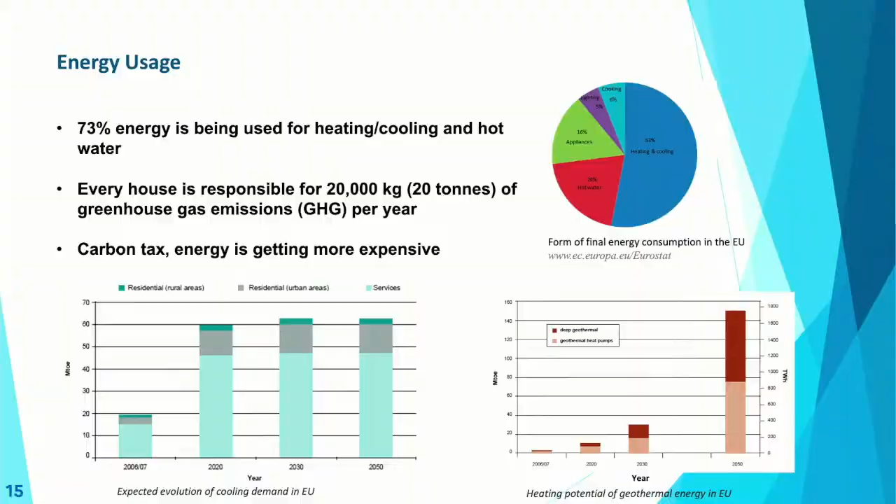What is geothermal? Geothermal energy is something that is free. It's just behind our feet. We know that if we look at our planet Earth, 99% of this planet is at a very high temperature, more than 1,000 degrees. So it's something free that, by estimation, can cover more than 1 million years of our energy demand needs. And it's free, so people decided to use this. But we did not invent anything.

In fact, when you think about what we are doing now, even for 20 years, we are just trying to improve what our ancient people had already developed. We know our ancient civilizations were also very intelligent. They discovered this; we have discovered nothing. We are just re-implementing, reusing what they have done in another way. We are just working on how to re-implement, reintegrate this technology that is very ancient. As early as 4,000 before Christ, they were already using geothermal energy. So it is not something new.

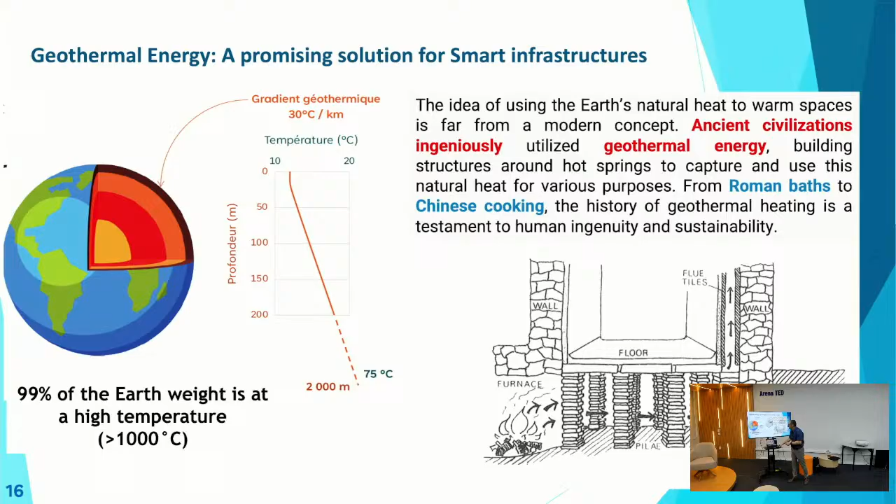When we talk about shallow geothermal energy, what is our concern, together with Professor Christina, is low enthalpy. You know what enthalpy is in thermodynamics - we are talking about low enthalpy or low energy. This uses the fact that at a very shallow depth we have quite a constant temperature. By exchanging temperature between the ground, the soil, and some technology, we can produce heat, and apart from heat, we can also produce cooling - today is very hot, so we're not talking about deep geothermal, we're talking about shallow. Shallow is only to produce heating and cooling. I will show you how.

Among this known, conventional technology, we will work on the integration of ground source heat pumps with some geotechnical materials, geotechnical construction, to provide energy. The next step is to integrate this shallow geothermal energy within what we call a district heating and cooling network. District heating puts all this technology together - all the renewable technologies - inside one unique network, to provide all buildings with this technology. You don't use this here for heating, but in Europe we do.

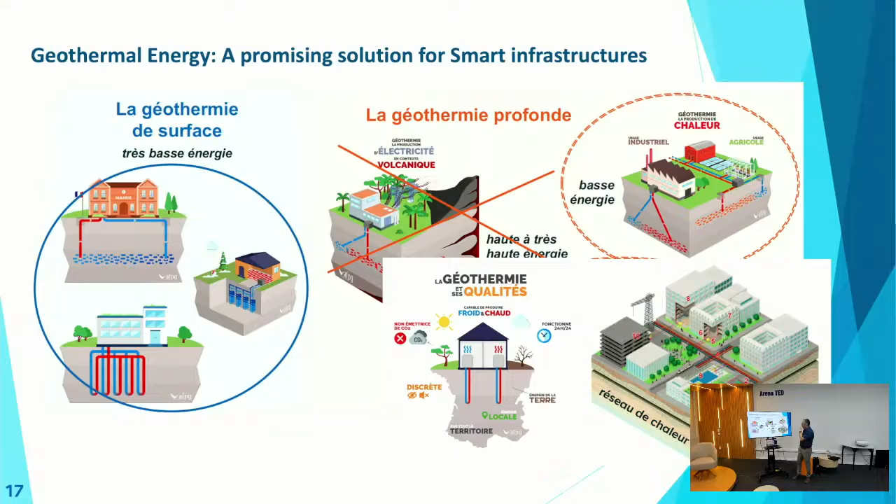So what is shallow geothermal energy? It's something that is more or less conventional technology - this one or this one, what we call boreholes, or aquifer geothermal energy. This technology is quite well known and well used, but it has some issues.

Let's talk about borehole, for instance. What is a borehole? You need to have space - so you need available space where you won't be able to build something else. You lose this space for future development. If you have space, for instance, someone building a home with a garden, they could put this in, but there are some issues with how it works. You have to drill, about 20 to 30 centimeters, and inside you put some tubes to extract the heat from the ground and inject it using a ground source heat pump, transforming the heat extracted from the soil into heating.

Why is it an issue? Because first, you need some space, as I told you. And secondly, when you drill, you need also to fill. You will use some grout, so it has a carbon impact, a carbon footprint that is not negligible. So this technology, even if it is quite good, has some bad issues about this carbon footprint and also about the necessity to have available space.

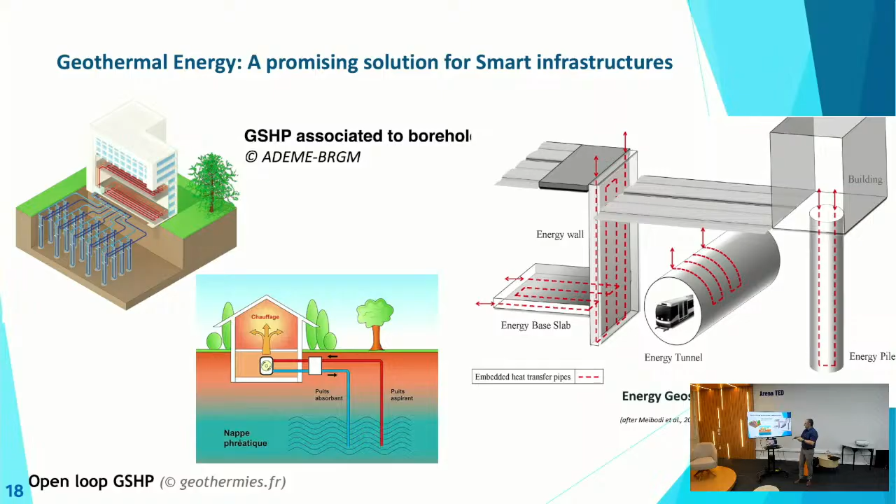And from this, geotechnical engineers, we, maybe from the 1980s, so more than 40 years ago, had this idea to say, okay, instead of implementing these tubes to exchange heat from the ground, why not integrate them in the piles that geotechnical engineers are designing? Because in all cases, we are implementing structural elements: piles, diaphragm walls, base slabs, tunnels.

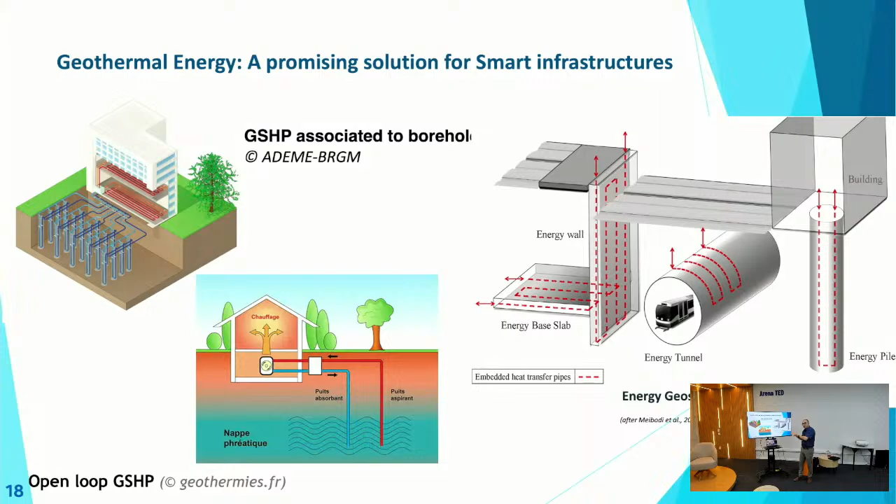Every geotechnical structure embedded in the ground could become a source of heating. This is how this technology has been implemented 40 years ago, and this is what we are trying to address. So let's talk about this technology.

As I told you, this technology is really interesting for us because, as you may understand, it has a dual role. Dual role means it has initially a structural role. These structures you see here or here are designed for a structural purpose. Then what you do, you integrate some tubes.

Inside these tubes, you will circulate a fluid at a certain temperature. The fluid will interact with the structure, which is mainly composed of concrete. This is the steel cage of a pile. This is the steel cage of a lining of a tunnel. This is the steel cage of a diaphragm wall. And in all these structures, you have these tubes where fluid is circulating and interacting with the ground.

And why does it now become very interesting? Because it is a very cost-effective shallow geothermal energy solution. Why is it cost-effective? Because the extra cost of this technology is only composed of the cost of the tubes. Because in all cases you need to have this structural function. In all cases you will need to pay for the concrete and for the cage. So the extra cost only comes from this, and also the heat pump.

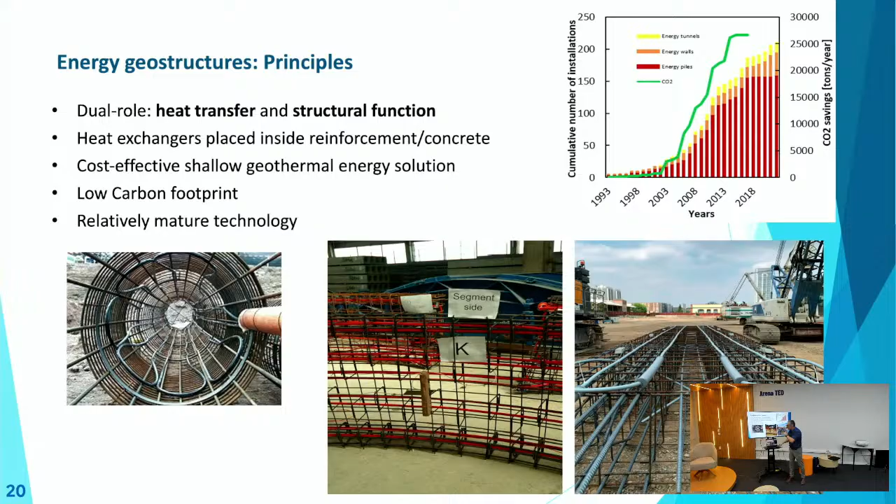And what is now interesting with this technology—you remember I told you, maybe I will talk about it later—let's just have a quick overview, because you should be aware of what is done in some experimental sites. You have some here, we have some. But you also have to know that this technology is quite mature. This is what I told you: it has been implemented in some real cases, not only buildings, but some very big projects.

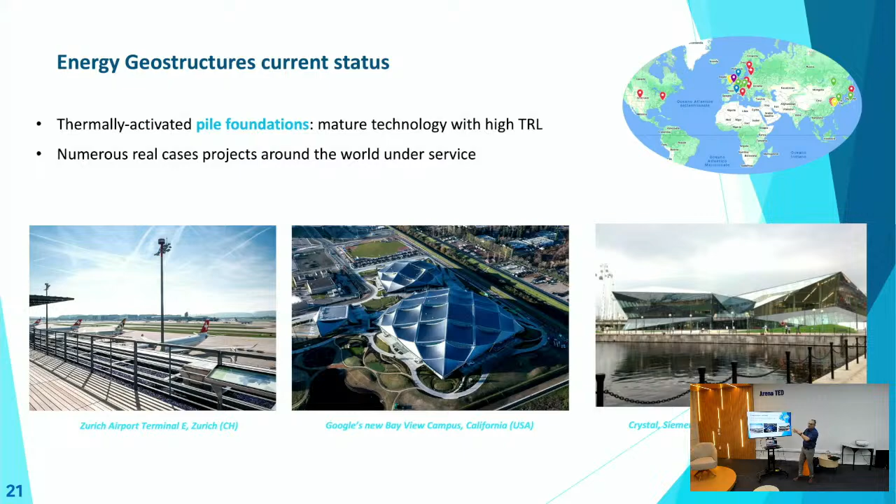You have the Zurich airport terminal, which is composed of energy piles. The same for the Google campus in the United States. They use this technology. The Crystal, Siemens—you have several cases existing. Also in Brazil, I know, but we'll need to update it.

Let's give you some inputs about this technology. Take Zurich Airport, for example. 306 piles are energy piles among the 441 piles that have been used. With these piles, this technology was able to provide over 70% of the heat demand.

That's not negligible. The other 30% comes from, let's say, an aerothermal heat pump, so with electricity, but at least they save 70%. What does this represent? In terms of mazout, the fuel they use for heating, it represents about 150,000 liters of mazout saved per year. You see the impact - it represents 400 tons of CO2 saved per year. So it's not negligible, you see?

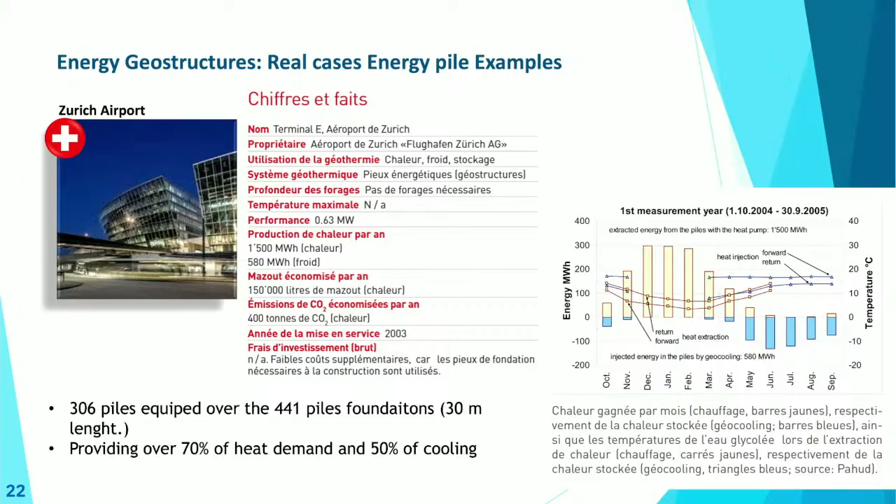And because of this first success story at Zurich airport, they decided to build an extension of this airport, integrating 1,000 new energy piles. You see, almost all the piles will be energy piles because you can combine depending on the energy demand and how you want to design it. You can decide, if you have a project with 1,000 piles, that 70% of them could be energy piles, or more. Here, they decided almost 80% of the piles are energy piles in order to cover between 75 to 100% of the energy demand of this extension.

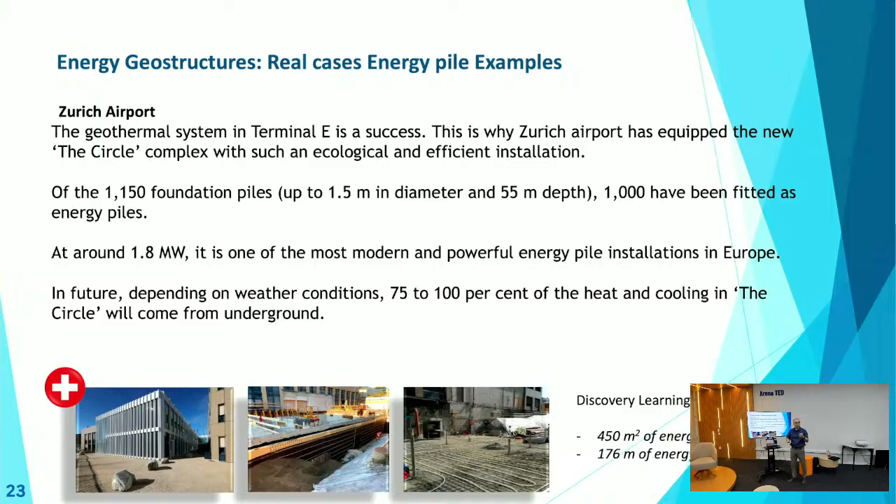So you see that you have real cases that demonstrate not only the feasibility but also the potentiality of this technology. This is something quite interesting.

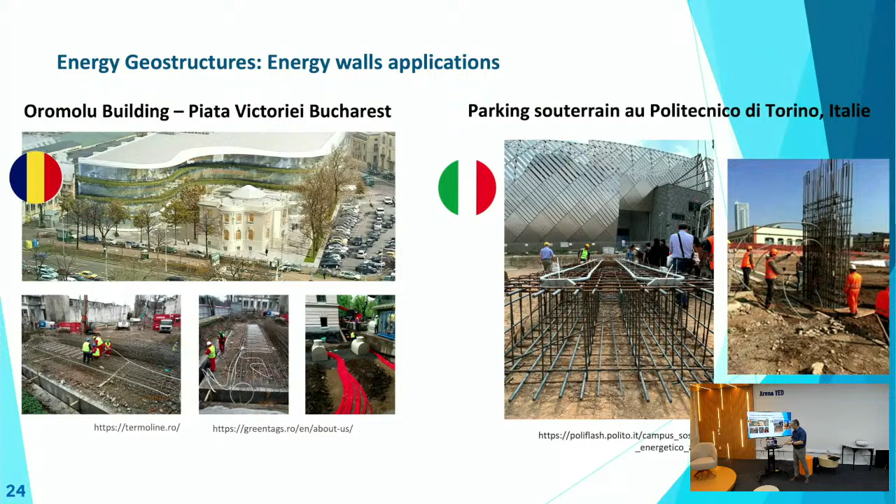I was talking about piles. Here, some real cases - we also have some other real cases about energy walls, these diaphragm walls, in Romania. They have some real cases. In the Politecnico di Torino in Italy, they also have this case. These are real cases, not small, not experimental. In France, there's also a metro station under construction that will be delivered next year. They use energy walls for the wall, but also for the basement, equipped.

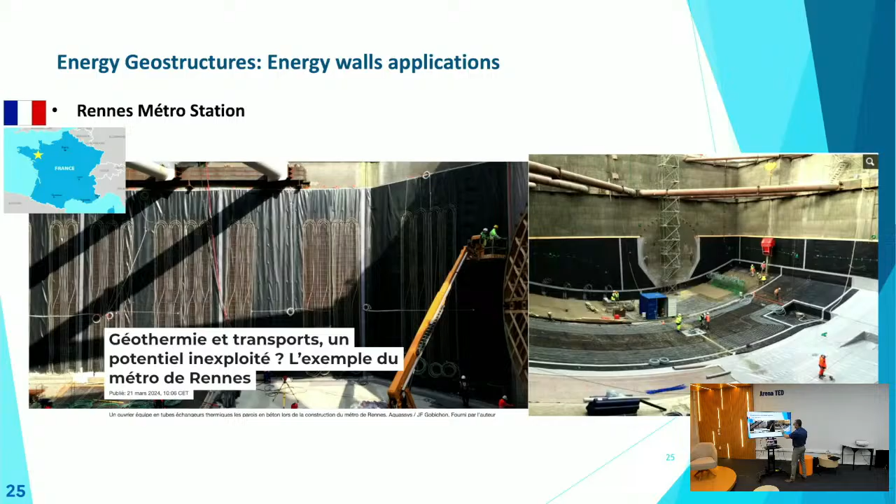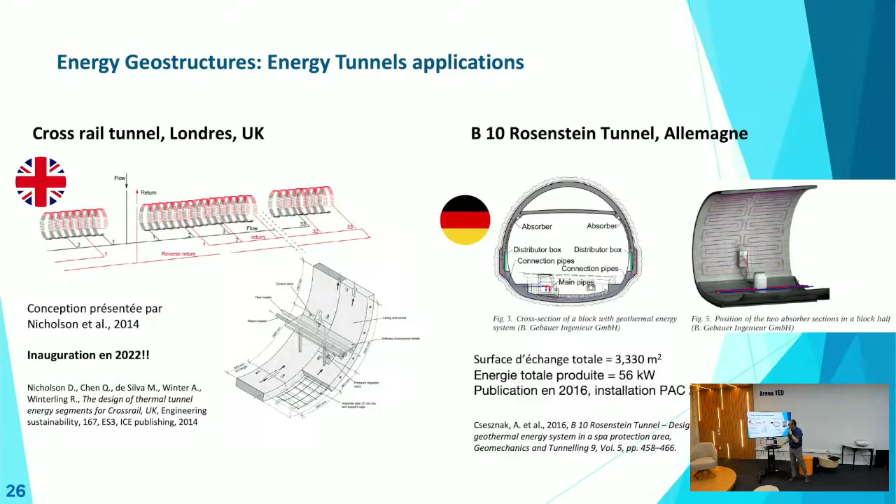You also have tunnel applications - a new one that was inaugurated 3 years ago, another one here in Germany. So they exist, but they're still quite particular technology because it's not every day that you build a tunnel. Mainly every day you could find a builder building piles, which is why we mainly concentrate our knowledge on piles, but also look at some other technologies. There are also some other innovative applications.

We have what we call quay walls. I don't know if you know what quay walls are. When you have a river and want to protect the wall, usually you use maybe wood panels. It's along the rivers. In every place, sometimes they put concrete panels, sometimes they put walls, but in Europe, mainly in the Netherlands but also in the north of France, they use metallic structures called quay walls.

Integrating energy walls here is a real positive and innovative technology, because this geothermal energy is not only capturing the thermal energy of the ground, but also of the water. So you exchange between the water and the ground. It's really interesting. We have these tunnels, as I already talked about, and we have micropiles.

I don't know if you know what a micropile is - it's a small pile. Among these, when do we use micropiles? We use micropiles in some specific applications, but also particularly when you have to retrofit a building, especially when you have a building that may experience differential settlement. Sometimes you have buildings with very important cracking, and then you ask, what do I have to do? I have to reinforce the existing foundation.

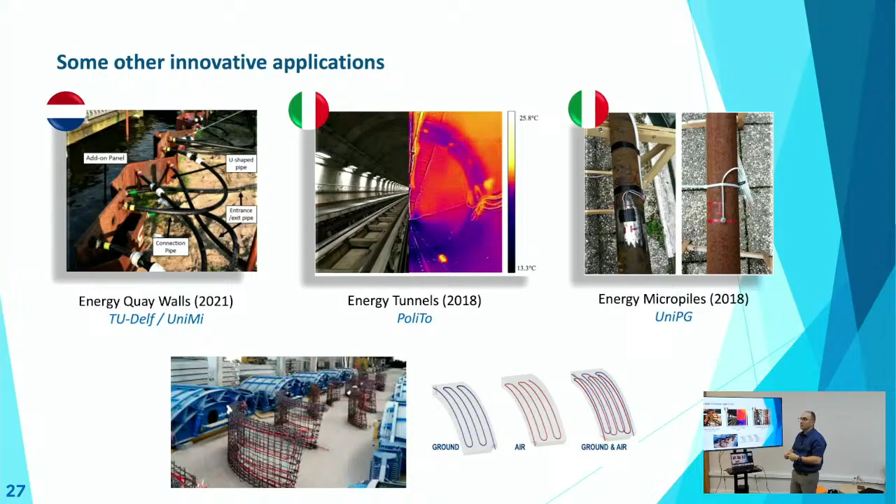Next year I will start a PhD position working on this topic, on a specific challenging material: chalk. As I told you, chalk is a porous media, and we have some challenges to work on the chalk behavior using this technology. So this is something we will start working on next year.

Just to finish with this part and then move on to the physics, because I'm not going to show you all the real cases. We have collected, among a project that I am coordinating in Europe, called FOLIAGE—you can look for it, if you put foliage you will find it—we have collected like 800 real cases over the world.

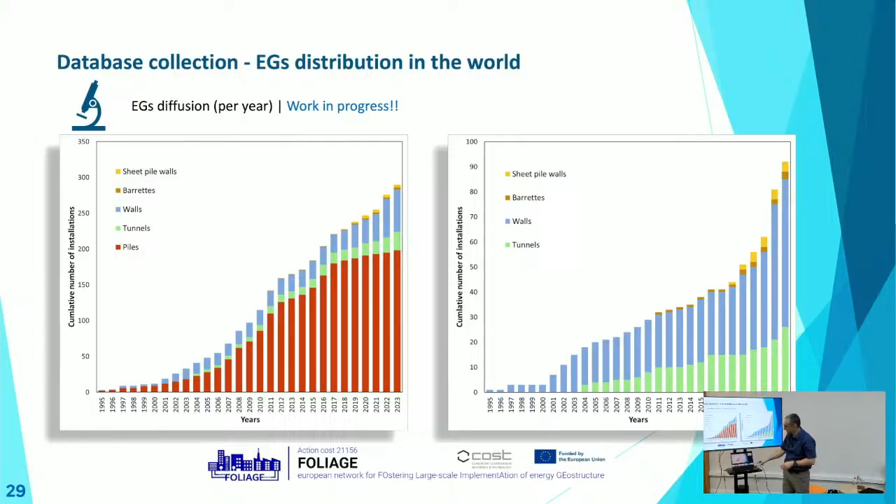As I told you, piles are the major part of real case installations in Europe. This represents the piles, and this is a zoom. This one represents tunnels, walls, barrettes, and sheet pile walls, where these systems are used for extracting heat. You have the evolution over the years, as you can see. We have collected this information and have more or less this representation, and then we will move to the next step.

You see that mainly this technology has been implemented in the UK, Austria, Italy. Where is France? France is here—we're not so bad, but we still need to improve. The objective is that all countries in Europe, and even over the world, start to use this technology, because we have proved, we now know that this technology works and is mature. Our work is to promote this technology, so this is what we are looking for: increasing this.

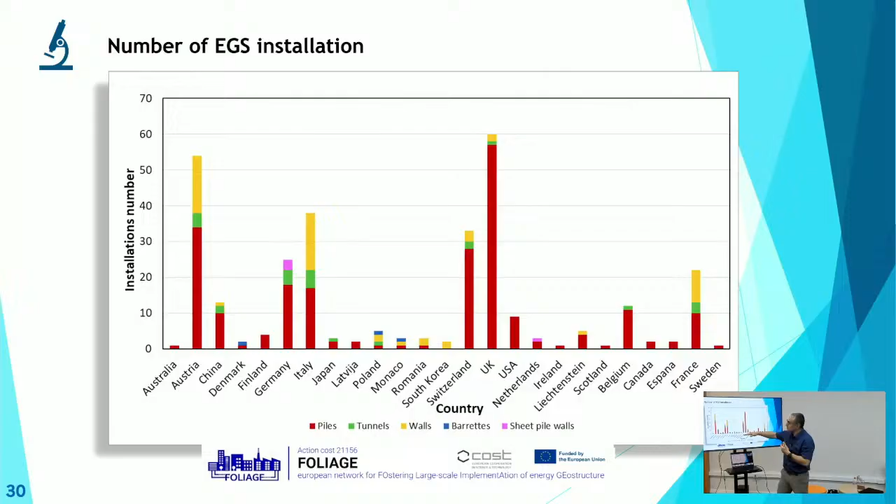That's enough for introducing EGS, what we call energy geostructures. Let's talk about the physics behind this—this is not new for those who have... what is the physics? This figure is really interesting if you take time to look at it. It explains all the physics behind the technology we are working on, and it explains why we need to continue developing research, because, as you understood, energy geostructures is a multi-physical problem.

You agree? We have thermal exchange. This thermal exchange has a logical interaction with the hydrogeological condition, with the ground and the hydraulic potential of the ground. If you have water, if the soil is saturated or unsaturated, if you have groundwater flow and so on, we know that heat can be transported hydraulically. So you have a strong interaction between thermal and hydraulic behavior.

And also, we are all physicists—mechanics is a part of physics. We know that when something is heated or cooled, it will react: it will expand or contract. So we know we also have a mechanical interaction. So we have this thermo-hydro-mechanical interaction that makes this problem quite complicated.

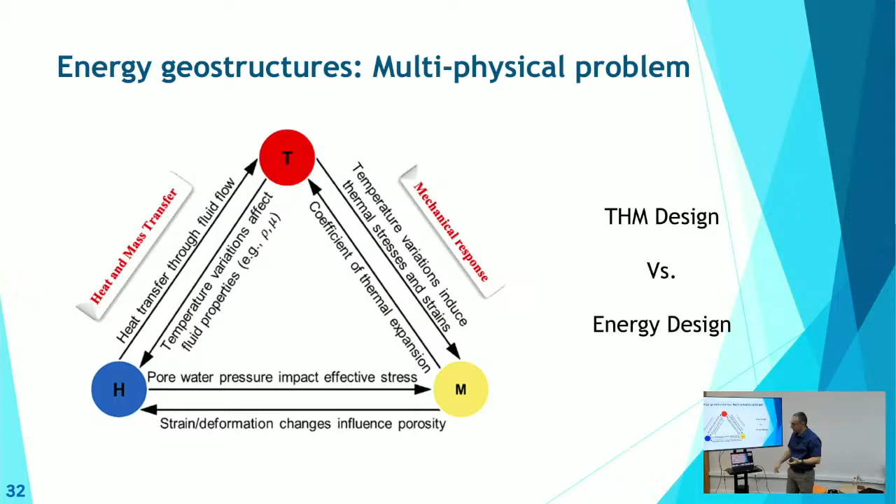We are all doing the same thing: we calculate the amount of energy extracted from the soil or injected, and also how it behaves. This is what we are doing. So we have two main systems.

Let's take a look at the first one, the thermo-hydraulic principles. I took the example of a pile, but whatever we use, it's always the same.

What is happening? Remember the geothermal flux, the heat coming from the center of the earth. This natural heating helps the soil keep a constant temperature. These are some values from France, but here in Brazil it's different. In France, we know the temperature of the soil varies.

You know how the temperature evolves. Depending on the outside temperature, you'll have a decrease or increase of temperature, and then it becomes constant, depending on the region in France or Europe, from 10 to 15 degrees, it depends.

Here in Brazil, it's maybe 23 degrees. In Lille it's 14, in the south of France 15 to 16, in the Netherlands it's 10. It depends, but what's important is that the temperature becomes constant.

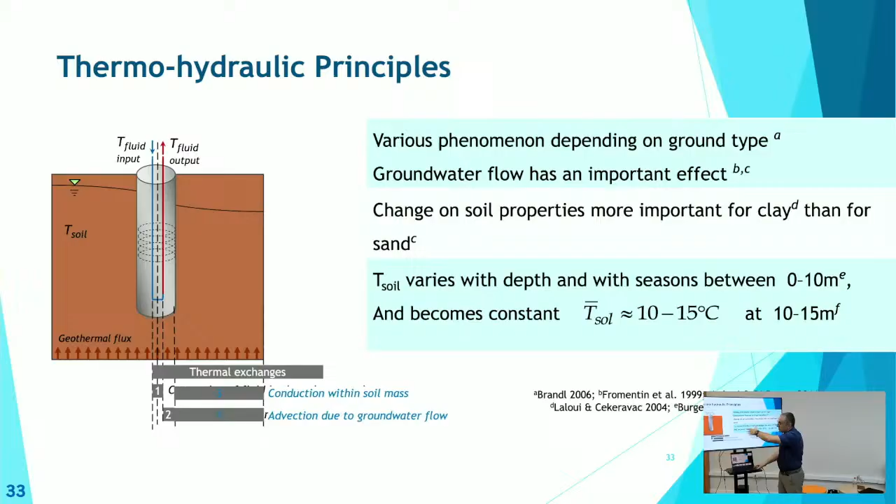What we know, because we can discuss this for hours, but at the end, what you need to know is that the main factors that influence the thermal performance of these energy structures are, first, the ground, the structure itself, pile, energy wall, tunnels, whatever you want, the internal environment, so the air, or if it's a diaphragm wall, the interaction with the inner temperature, if it's a tunnel and so on, and the absorber pipes themselves.

When you look at the ground, we know that the factors influencing it are the ground temperature, and the thermal conductivity, which we have to calculate and measure. Have you ever heard about TRT, the thermal response test? Some of you haven't. So we have some tests, some possibilities to estimate it. But you will see it's not really obvious, because the soil is not homogeneous. The constitution of the soil is quite complicated, and if you have several different layers, which I'll present later, you'll see that this parameter, which has very high importance, is not so obvious to determine.

You also have the ground saturation. In the simplest way, when we do the calculation, we try to work considering that the soil is fully saturated. But this is not reality. In reality, the ground saturation has a very big influence - whether you consider non-saturated, unsaturated, or partially saturated conditions, and so on.

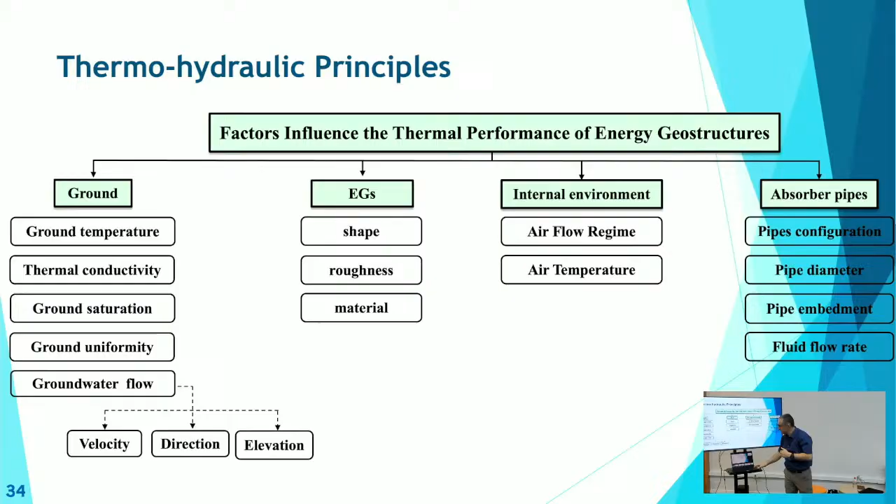I'm talking too much. Do you want to take some water? No, it's okay, I'm fine, don't worry. I'll make a little break just after.

Some main findings about what I'm saying - you can see it, I'm not going to read it, you can read it yourself. How the ground temperature could influence things. These are some results coming from the literature, this is the literature review. About the thermal conductivity, as I was saying.

You see, in general, the exchange heat increases with increasing thermal conductivity. But in some cases, when you have an increase of heat with the thermal conductivity, that means it's maybe more significant in summer - what we call summer, remember, when we inject heat into the soil. Maybe if we want to use international language, we should say extraction or injection. Maybe it's better.

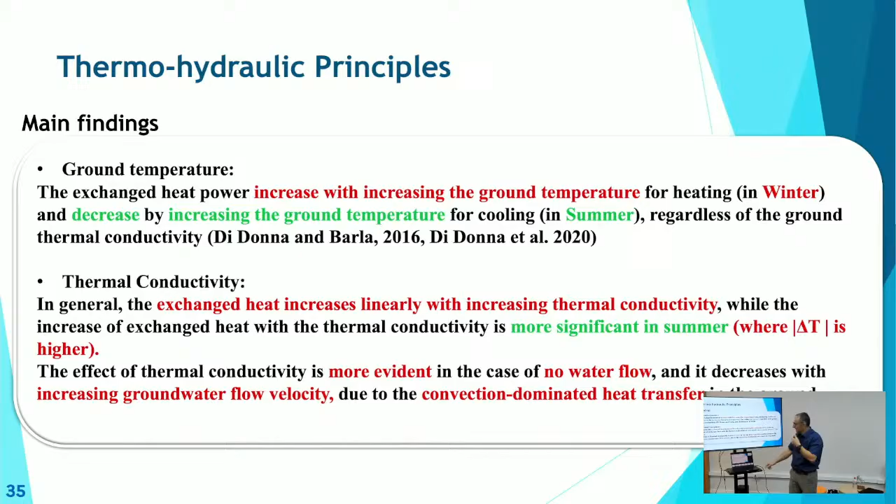Because what we call winter is not the same for you, and what we call summer is not the same, I know. Okay, about the ground saturation also.

You can see that the stored or extracted energy, and the loss of thermal energy for an energy geostructure in dry soil, is lower than in saturated soil. So we know that there are some influences.

This is also about the groundwater flow. The exchange heat increases in a nonlinear way. That means we need tools that are able to take into account this non-linearity. It's not really obvious.

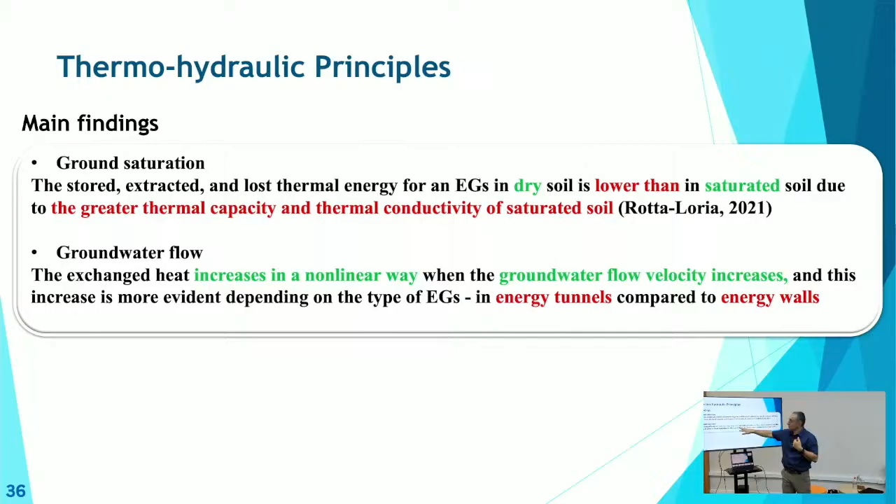When you do experiments, it's automatically included because it's reality. You are not creating something, you are working with real cases. So all this is done. But when we do calculation, we have to take all this into account, which is really a big issue.

As a conclusion, between the two cases, groundwater absence or presence, we see that when there is no groundwater, conduction is the main heat transfer phenomenon, with the major effect of the ground thermal conductivity, in a limited disturbed region.

In presence of groundwater, you have the combination of conduction and convection or advection with transport, with the major effect being the groundwater velocity rather than the ground thermal conductivity.

We have some regions that are really affected by this thermal exchange, called the panache, the transportation of heat with the velocity. So the heating is not evolving symmetrically around the geostructure, but shows a dissymmetry of the results. This has been observed by Marco Barla in 2016, and this is also what we observe when we work on our tunnel results.

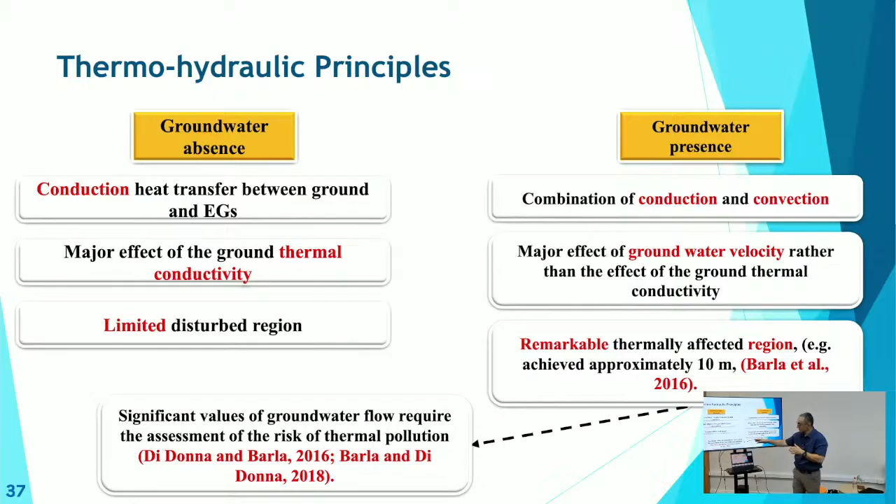And this is why, when you have significant values of groundwater flow, you need to assess correctly the risk of thermal pollution. So these are the main findings about the thermohydraulic principles.

Now we have the second way, the thermomechanical one. When we talk about thermomechanical here, you have to keep in mind that we also have the hydraulic condition, so in reality it's thermohydromechanical principles. What are the factors that influence the thermomechanical principles?

You have the thermal operation, something we always talk about. Depending on if you extract or inject heating, the behavior will not be the same. The results also depend on the thermal activation time, meaning when do you start and how do you start.

If you start by extracting or by injecting, it will not behave the same. There is no symmetry. This is really important when you want to design, to see how it happens.

And also the ground, the soil permeability has an influence, as I told you, thermohydro. Also always the thermal conductivity, because this is the parameter that controls the diffusion of the temperature and then the mechanical response.

The thermal expansion coefficient, why do we need it? Because this is the parameter that controls how the structure behaves mechanically. Does it expand, how much it expands, or contract? And also the groundwater flow, as I told you, the velocity and its direction.

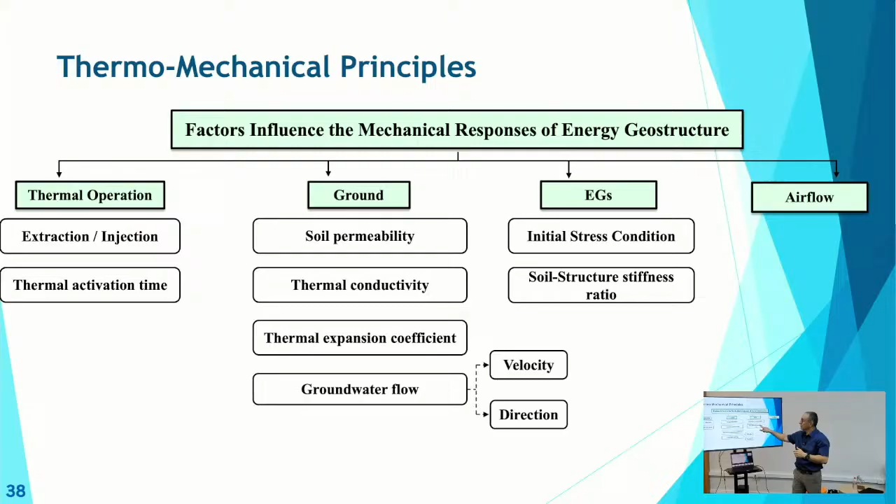So it's really important to be able to reproduce it. And also the airflow, as we discussed previously. Let's have a quick break, are you okay or you want a break?

Okay, we continue. Let's talk about this empirical behavior. I choose pile because it's quite easy to reproduce and to catch the physics.

What happened? This is the pile that you initially designed for only mechanical purpose, the initial pile. This is how, when you design a pile under axial loading, you have this: you have the settlement of the pile, which is quite constant, you have the induced axial force, and you have the shaft friction, more or less.

This is something conventional. What happened when you inject? Sorry, when you extract, that means in winter mode. In the winter mode, you remember I told you delta T will be negative. So the pile, if the pile is free to behave, it will contract.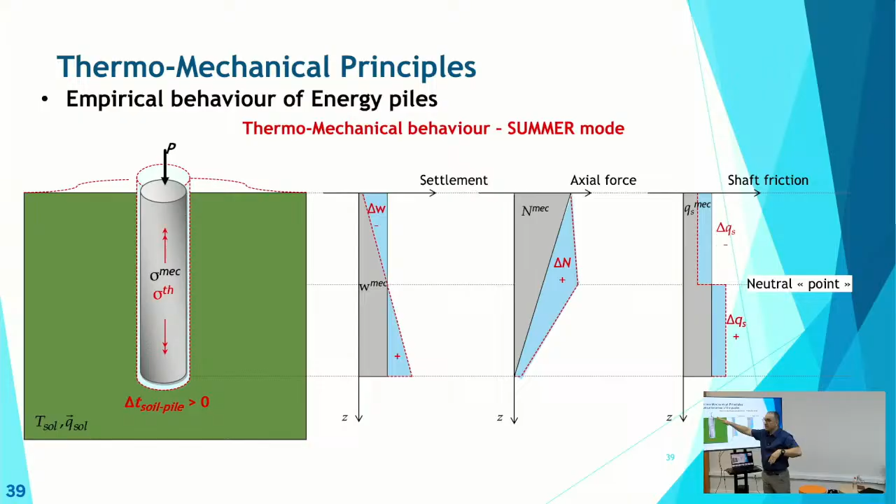But we know that piles are not free to behave. Why? Because they are connected to the basement, they are connected to the building, so they are not free to behave. The problem is much more complicated.

On the basic approach, just to have some idea about the amount of deformation, the strain we are talking about. You all know this value of thermal expansion of concrete, it's a well-known value. It's the same for the steel, you know, otherwise we cannot put steel into concrete. So if the pile is really free to expand or to contract, what would happen?

You will have, for a delta T of 15 degrees -- I don't remember, but maybe it was 12 meters length of pile -- some 1.8 millimeter of free displacement. It's a very small displacement, so you see that mechanically speaking, it's not really a big issue. This is if the pile is free to behave.

But in reality, the problem is much more complicated. Why? Because, as I told you, here you have a superstructure that is blocking the pile. So the pile will induce some additional effort on the building that we need to estimate.

And because of the restraining head condition of the pile, you will have more concentration on the interface between the pile and the soil. And if you have a concentration of stress here, that means that over cycles, over the years, heating, cooling, what you will have? Some sliding effect.

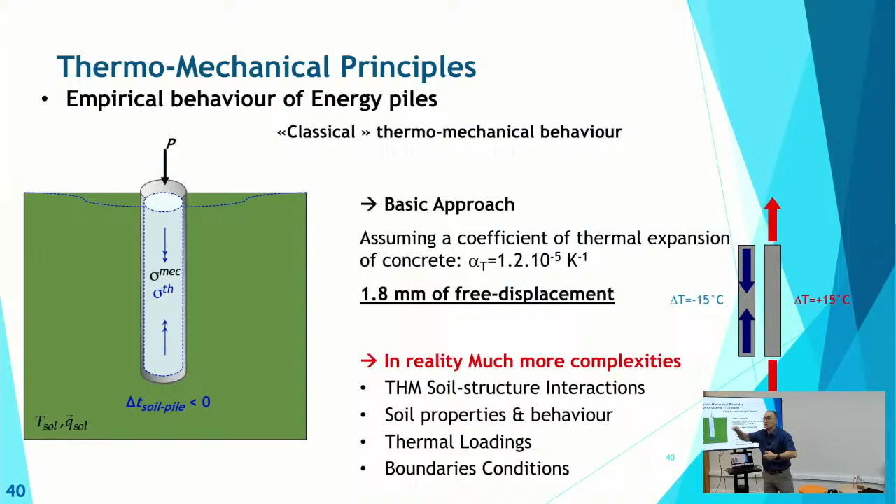So depending on the scale, it becomes very complicated. This is what we call thermal loading, how to model this, and also the boundary conditions. The boundary condition is what I was saying - what is the head fixity of the pile.

So how to address this problem? We have mainly two ways. The first is the experimental approach: field case, labs, sometimes in real dimensions, sometimes in reduced scale. This is what is done here.

Here in Brazil, now I can testify. You have incredible works, it's very good. You have this very good approach. I know, I see it. So I can testify, this is what you have done. All of what I was talking about is being addressed here.

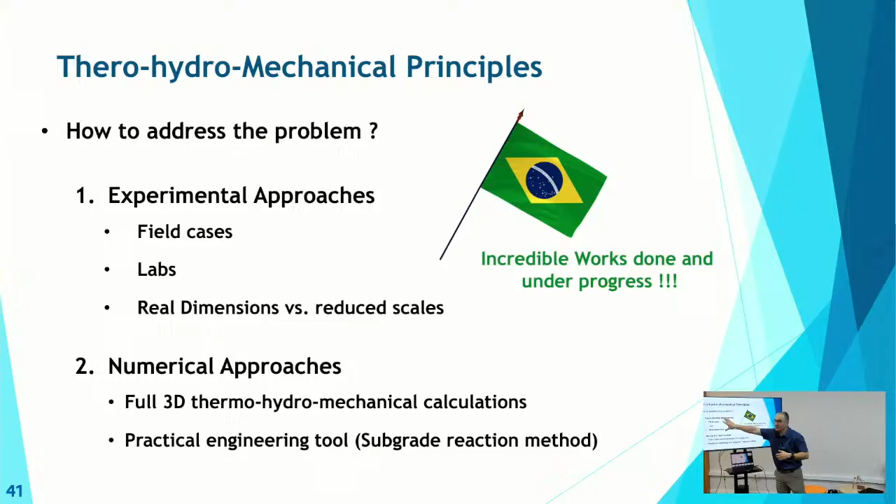And then you have the numerical approach. I have a numerical background, so I will talk about it. I will not be good to talk about the other one - Professor Christina will come from France and she will talk about it, a reverse approach.

To address this problem we have what we call global approaches. Global approach, you know what it means when you do numerical modeling - it's when you integrate the ground and the geostructures in the same model. It could be axisymmetrical, 3D, or like here in 2D condition or 3D condition. This is more or less complex depending on what you want to do.

This problem is highly nonlinear, as I told you. And we need to take into account the thermo-hydro-mechanical condition in the finite element calculation.

Let's take a look at what we need to do this model. Who is doing numerical calculation here? Mohammed, Pankish - who is doing numerical modeling? Okay.

For the master students that will have to do this, you need to represent your ground, to model its behavior - this is what we call constitutive law. You need a mechanical or mathematical, mainly mathematical, representation of how the soil behaves. If you assume the soil behaves linearly, everything is easy, but this is absolutely not the reality. So you need to use a nonlinear representation of the soil.

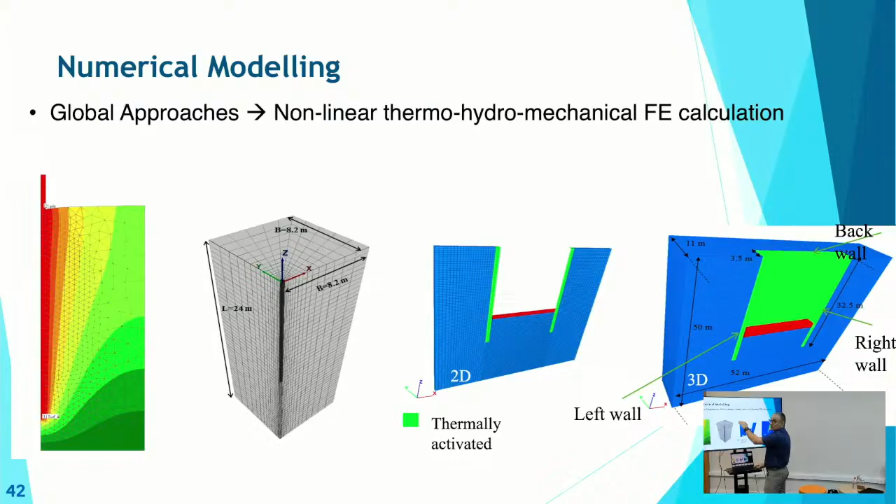You need to also estimate the initial condition, the thermal condition, because the soil is not at a constant temperature - from the first 6 meters it evolves, then it becomes constant. That means, for instance, here we assume whether the temperature inside is constant or not. Maybe it's 20 degrees here and 0 degrees here because this is the surface if you are in winter. So you need to define the boundary conditions, what we call Dirichlet and Neumann. The Dirichlet condition is how the thermal and mechanical boundaries are fixed.

The lateral is fixed, it doesn't move. The substratum is rigid, it doesn't move. This is what you call Dirichlet boundary condition. Newman is the flux or the loads. So you need to define this correctly.

And among the loads, these are the mechanical loads, you also have to design correctly, to represent correctly the thermal loading. So you see that it is really not easy. On the first attempt, you can assume that everything is easy, but it is not the case.

I forgot something when I talk about initial condition. Do not forget the initial stress condition. Do you take into account the fact that when you have installed the pile, this is what Pankishu are trying to reproduce.

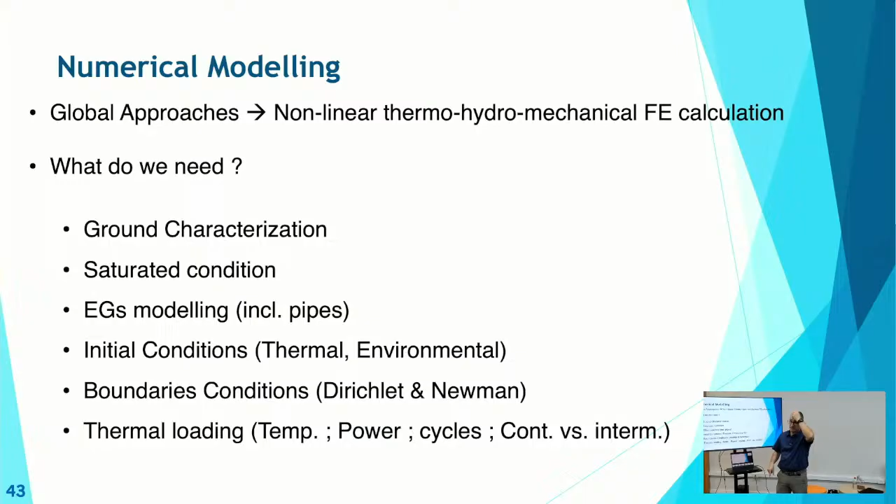The helical pile, if you want to implement it, we know that it will disturb. And imagine that after that, you use your helical pile as energy pile. If you do not take into account the modification of the initial stress state, you will not have good results.

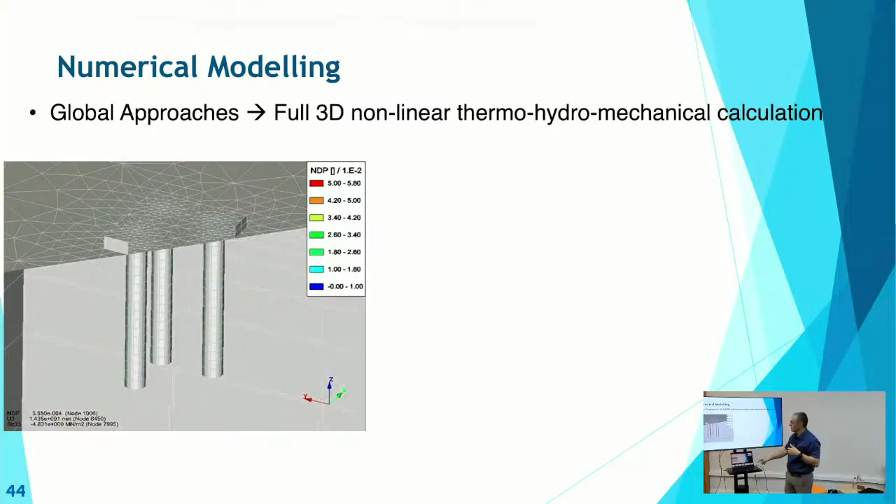This is how a numerical problem works in a 3D model. These are some piles with a cap. So if you need to reproduce it, the question is, if you remember, how to take into account the nonlinearity behavior of the soil.

You see that the soil colors are the level of plasticity within the soil, the plasticity induced by the load applied to the pile, to the group of piles here. So you see that the behavior, it's definitely nonlinear. You have plasticity that is evolved. If you have plasticity, that means that it is not linear. So the question is how to take into account this

nonlinearity of the soil at the interface. First question, do we have an influence of soil parameters with the thermal variation? We know that for sand, it's mainly well addressed, it will not change for sands. For clay, it depends, that means that we need to take it into account: the influence of thermal loading, as I told you, and the influence of boundary condition of pile head fixities.

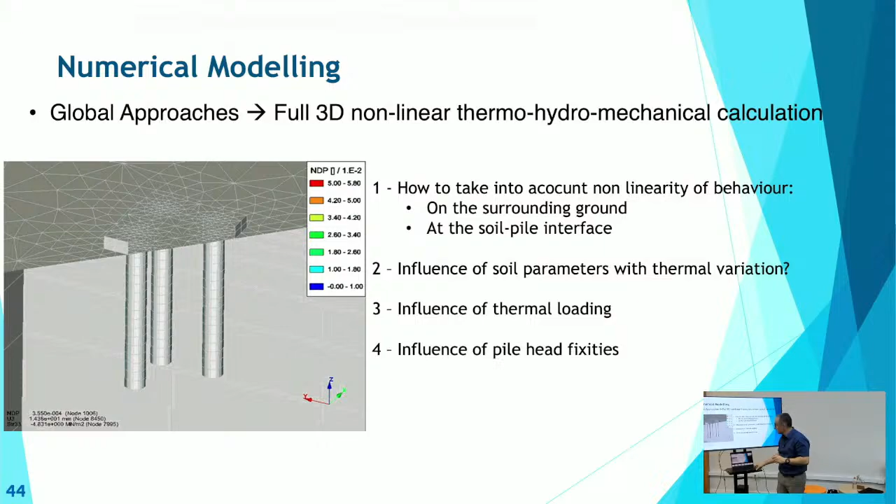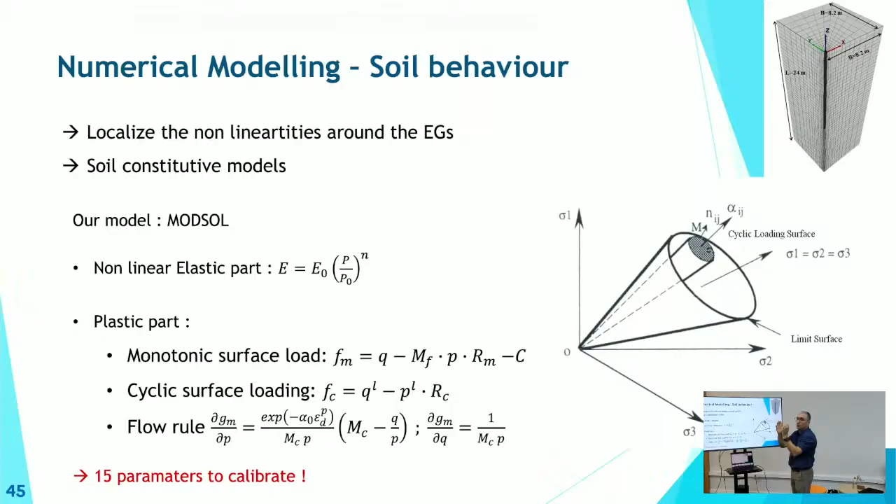But in one specific location, maybe we could have some strong discontinuities, some strong non-linearities, even at this small value, at the interface. So instead of doing a 3D mesh where we refine the mesh around the geostructure to capture the deformation of the soil, what we can do is look only at the localization of these non-linearities. We know they will mainly behave at the interface. So another solution to do something much easier is to use, as Professor Christina said, Mohr-Coulomb for the soil, it's large enough.

But if we do this, we also need to take into account this strong non-linearity that could behave. What we can do then is introduce what we call interface elements. These interface elements are contact elements that can reproduce several types of behaviors between stick condition. Stick contact is adhesion, meaning that independently of how the pile behaves, the soil will keep stuck to the pile. It's not reality. At the beginning it's real, but after that this interface element could also reproduce slipping, sliding effect, and even in some local places we could have disconnection of soil and ground. Interface elements allow this.

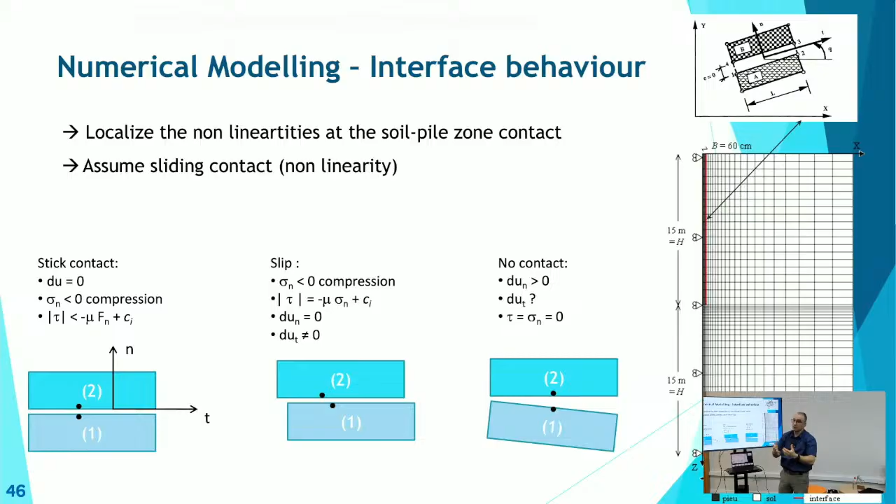And why is it now much easier? Because we are working on a plane, not in 3D, so it's much more convenient. This is more or less the same model. You remember Mohr-Coulomb—this is Mohr-Coulomb. Inside, stick, elasticity. Here, plasticity, it starts to slip. And this line, when f is greater than 0, it's forbidden. We can never have it. We have to correct—these are the iterations.

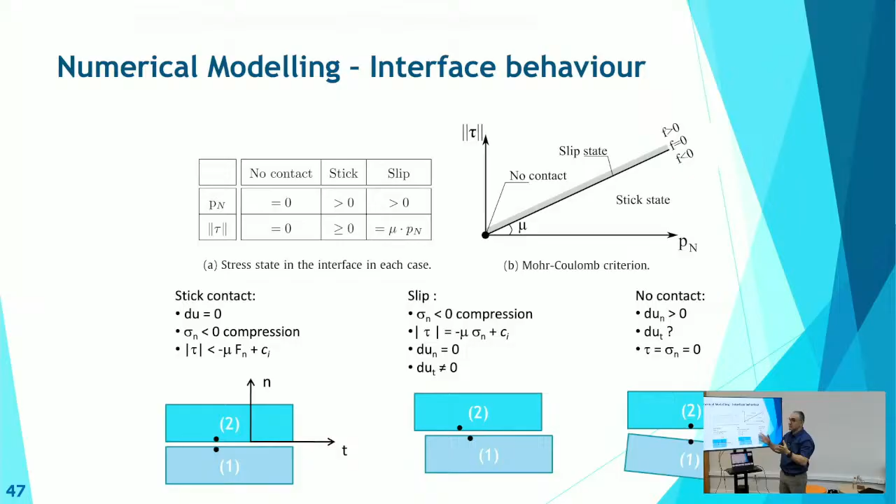For the person doing the calculation, when you see some iteration, it's because you do a calculation, reach this space, then you have to come back. These are the iterations. And this line, as I told you, could move, and instead of having this non-linearity on the soil, we have this non-linearity on the interface.

This is what we have developed. We call it, you remember, Modsol for the soil, here Modjoin for the joint—this is also a model we use, exactly the same. Isotropic hardening parameter, you remember—DR is the isotropic hardening parameter that controls, as I told you, this is Mohr-Coulomb. It starts from Mohr-Coulomb, then it can expand. And this is the kinematic one, where it can move at the interface. Doing this, we are able to take into account the hardening and the degradation of the interface at the soil-pile or soil-wall interface.

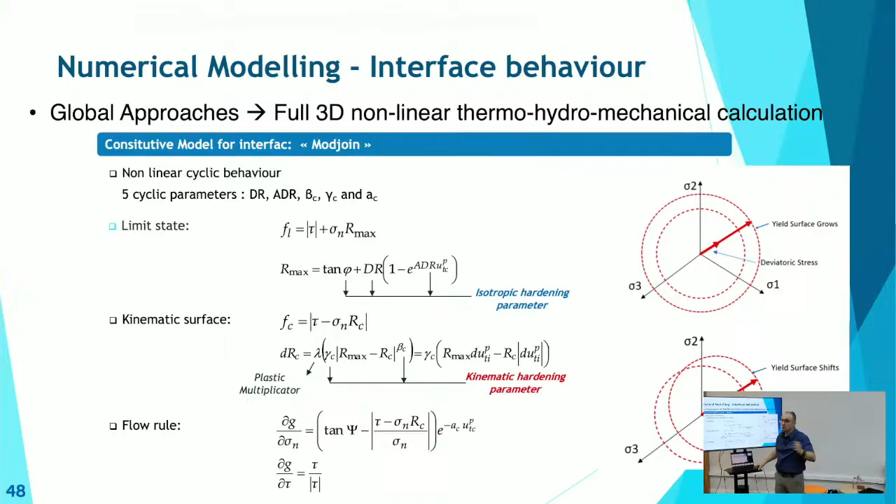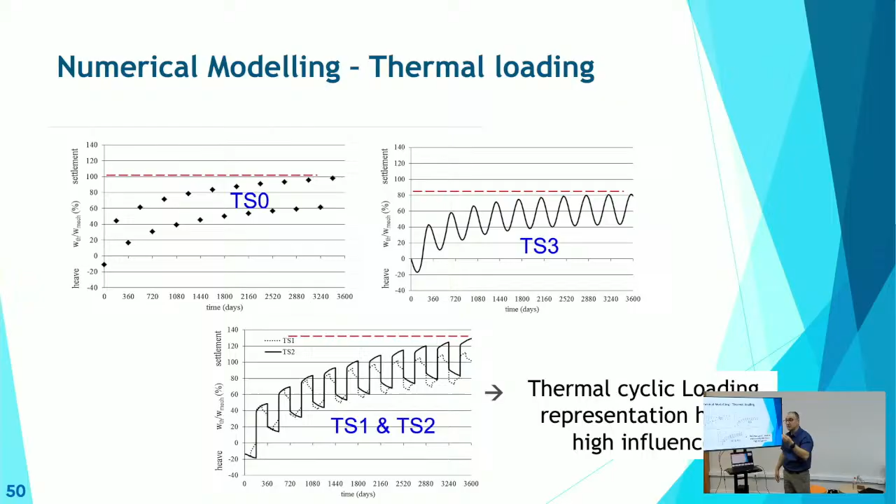We are not going to go into details here. These are the induced displacements. We see that the thermal cyclic loading has a very high influence, and this is really important—this is exactly what Bruna was showing last week. We now have the right tools to reproduce it.

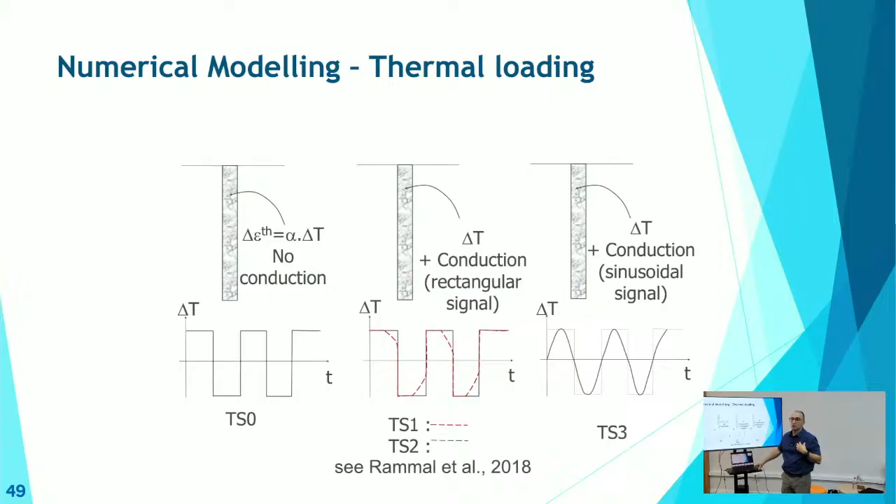But it is still too complicated to do like this. So what we try to do—because we have some partners, like Pinto, who would like a more practical engineering tool—they don't want a 3D finite element calculation because it's time consuming. They would like a very easy tool. So we have developed, with one of my PhD students, a new 1D model.

This is close to, I don't know if you've ever heard of this, the subgrade reaction method, the TZ model. You know the TZ model, yes? I don't know if the students know. No. Yeah? Okay.

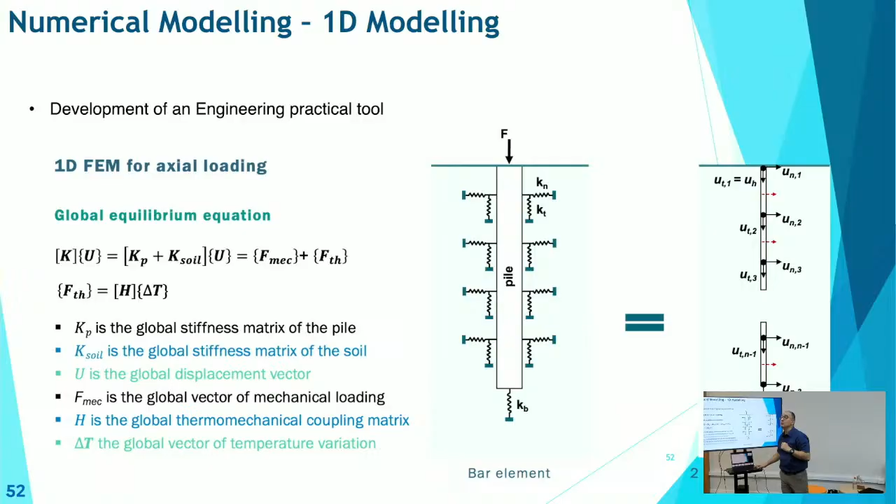In our TZ model, we introduce something new that is not taken into account in the conventional TZ model. We model the problem with a 1D bar element, and on each node we introduce two types of springs: not only Kt for friction, but also Kn, to take into account the variation of normal stress along the pile.

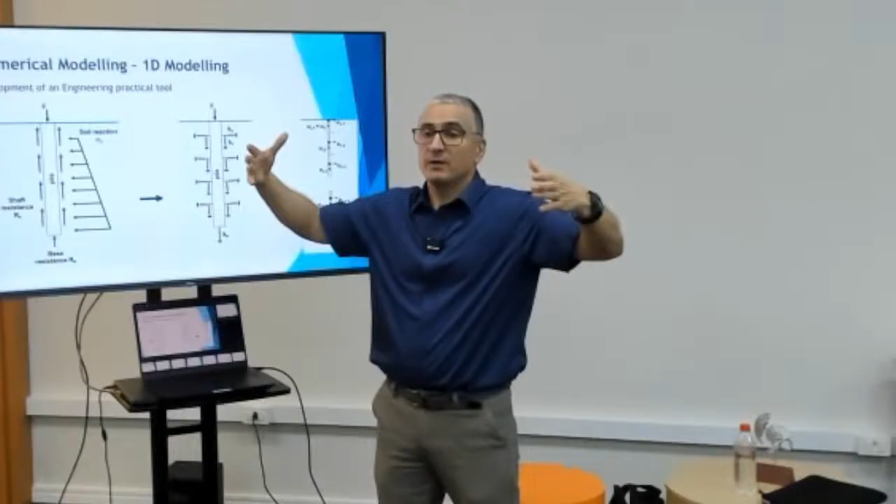The conventional TZ method does not take into account the fact that the normal stress could vary. So we enhanced this with a new tool where we have this variation of Kn, and then we introduce plasticity on the springs.

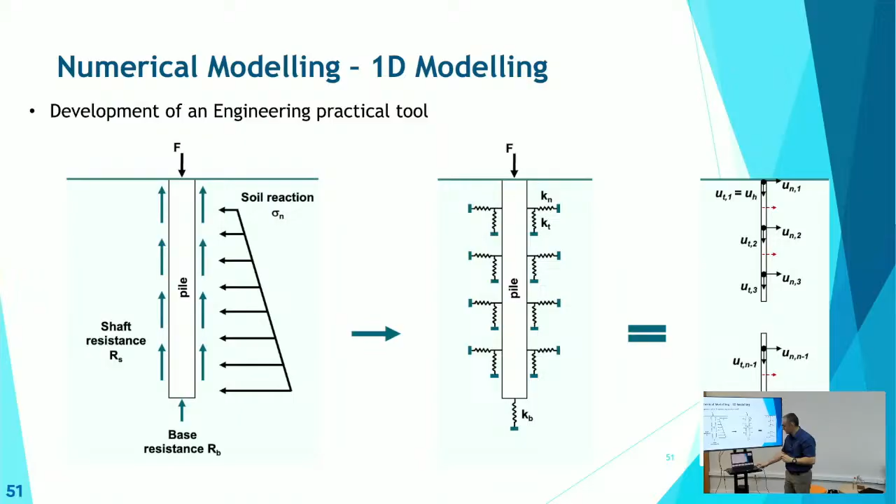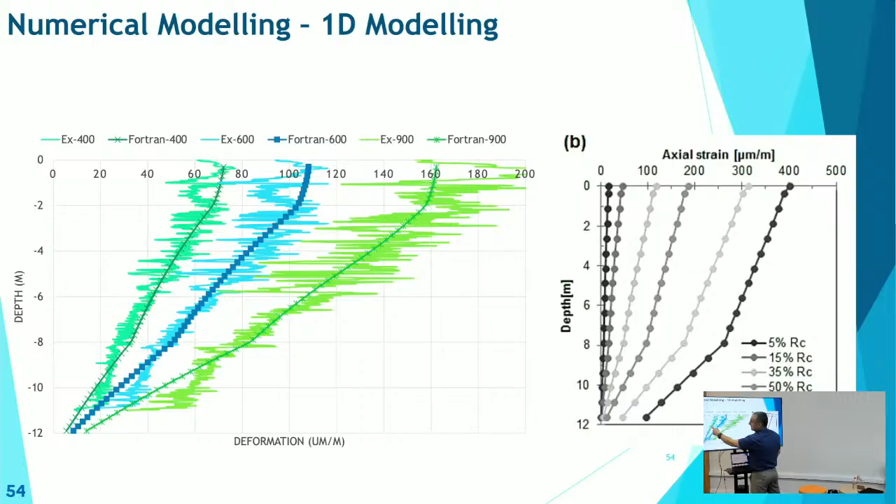This is the new model integrating Kn and Kt, versus the conventional one where you only have Kt. These are our results with Kn, these are the experimental results, like yours Christina, and this is our numerical modeling. So it works much better than the conventional one.

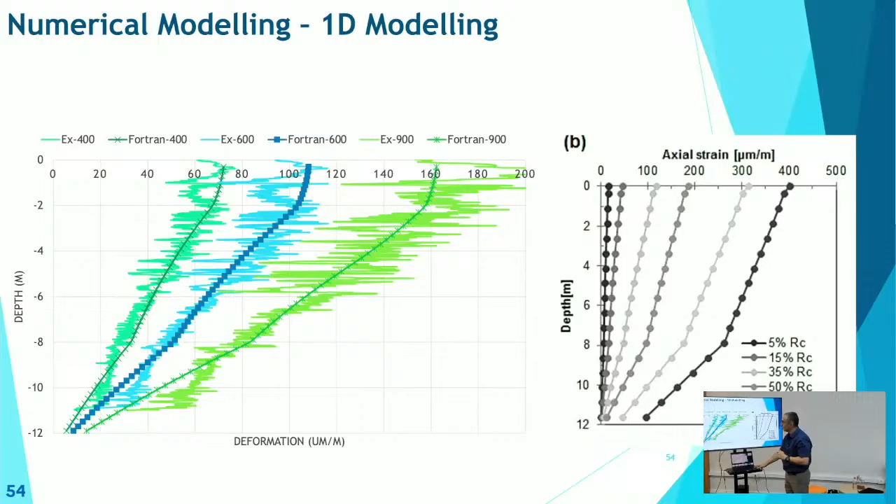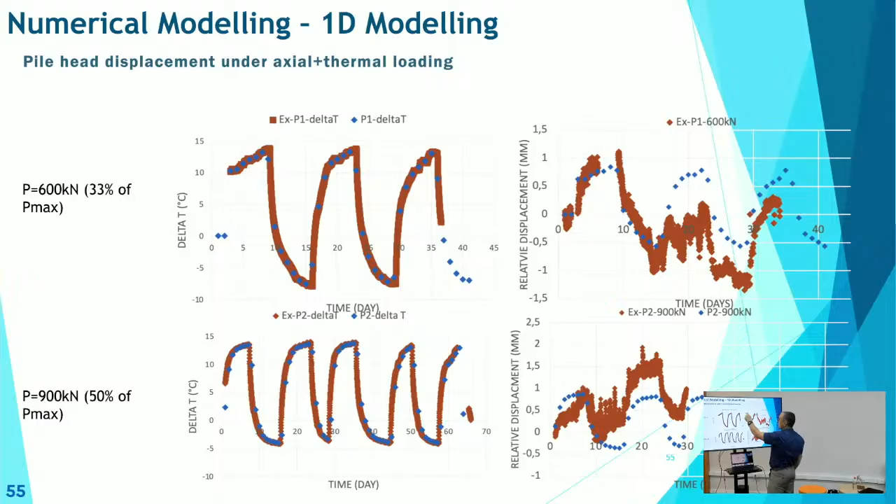Even with cyclic loading, the points are our numerical results. They're quite good, more or less. This is delta T and this is the relative displacement. We have more or less the same trend, depending on the level of mechanical load applied on the pile. So these are our results.

We are at the conclusion. So why do we need to continue this work? We know that there are limited studies on the performance of energy geostructures in unsaturated soils. We still need to work on it.

What we need is to develop preliminary charts to better understand and estimate the amount of energy extracted or injected in the soil depending on the groundwater level. This has not been done — what has been done previously is in saturated soil. So we aim to do the same for unsaturated soil, studying the thermohydromechanical response of energy geostructures in unsaturated soils.

When we talk about unsaturated soils, we also have to take into account that, for example with chalk, it's no longer just a soil but one with voids and partial non-saturation. So it becomes a porous media, and the equations are not really the same. We have to take this into account — this is what we do.

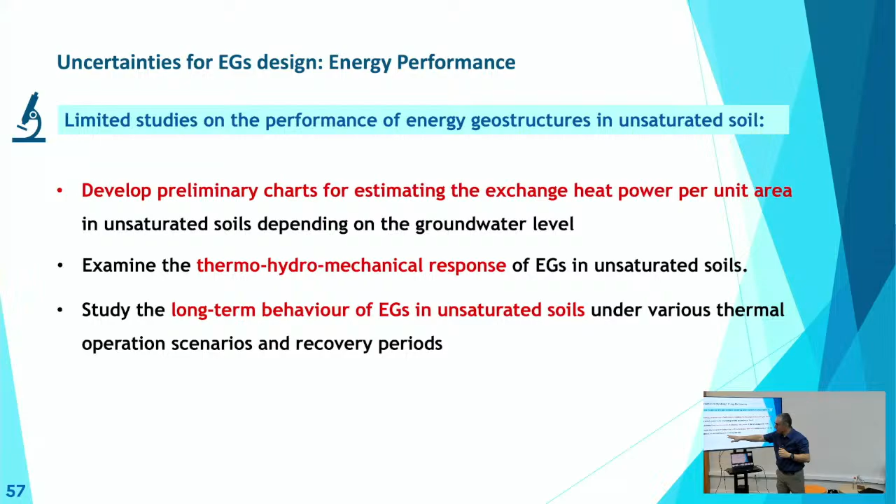After that, we aim to study the long-term behavior of energy geostructures in unsaturated soil, taking into account recovery periods, exactly what you also have, Christina. This is what we do.

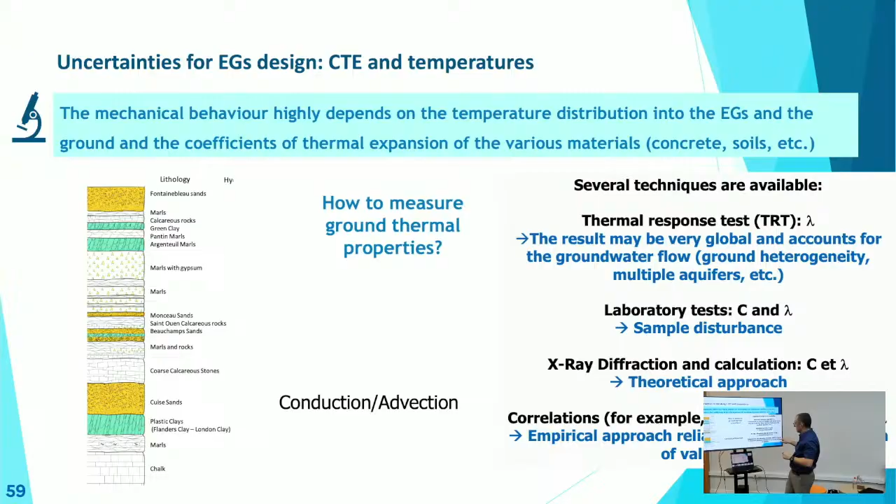You have different possibilities: the thermal response test, laboratory tests, but all of these are impacted by some issues to overcome. It's really complicated, and you also have to take into account that you don't only have conduction, but advection could happen, which could influence the value of lambda C that you measure. So this is really challenging.

So, coming back — what is the influence of this regional heterogeneity of the permeability distribution? What is the influence of the stochastic permeability distribution? Because we know that we have this stochastic permeability distribution. What is the influence of the time-dependent stochastic permeability distribution?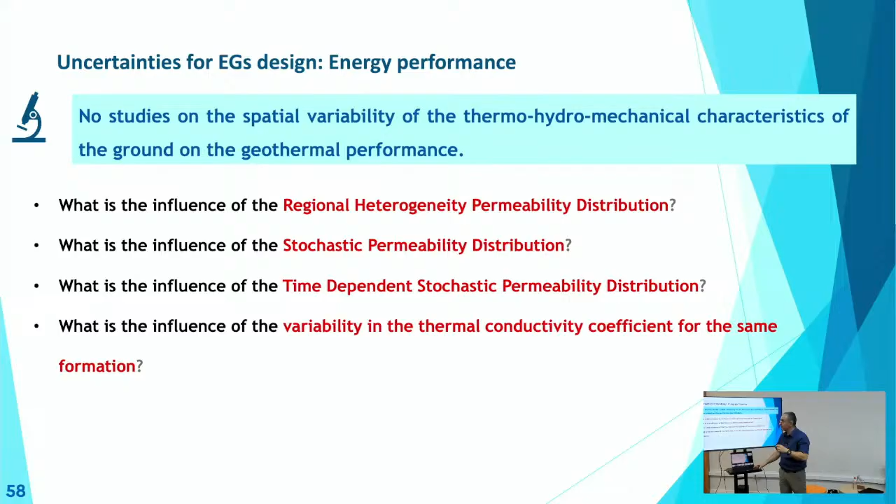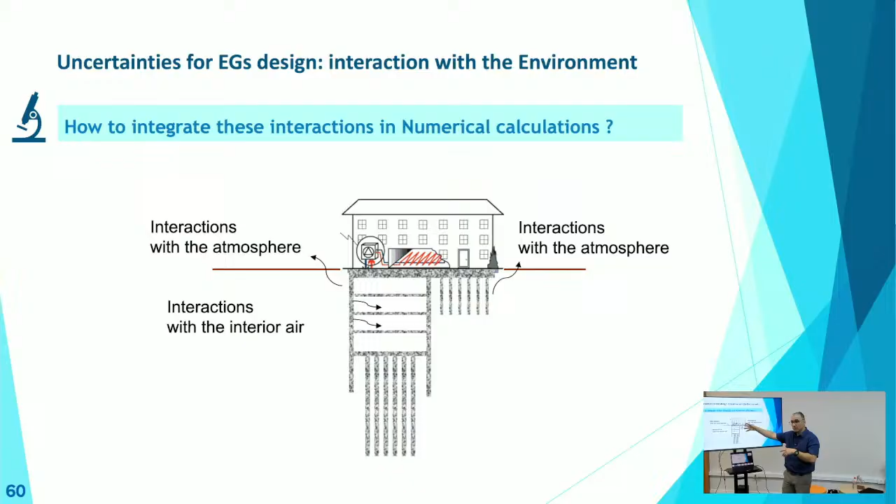Because it's also changed with time, depending on the season, and what is the influence, as I told you, of the variability of the thermal conductivity coefficient. Within the same formation, within the same soil, we could have a variability of the value depending on the water content and so on. So these are all what we need to do, and also how to integrate all these interactions, the interaction with the atmosphere, the interaction with the interior air in some cases, how to integrate it in the numerical model. These are our challenges that we still need to overcome with all the tools we are developing.

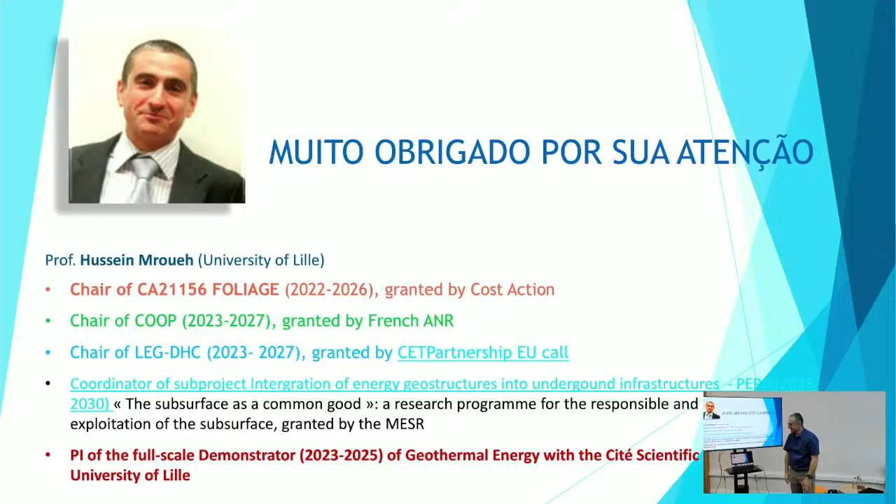It was maybe intensive, no? Sorry. No, you can take some water. Yes, it's okay, I still have some also power. Sit, no, I will sit. If I sit, I will not be able to.

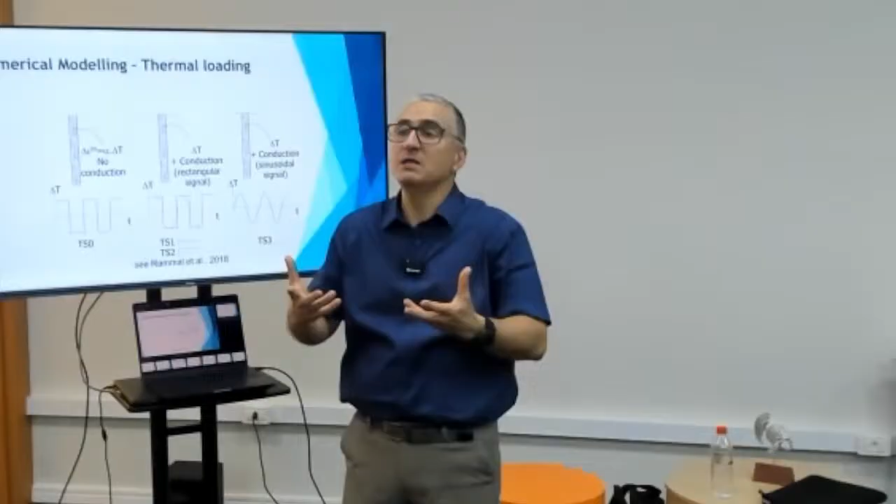So for sure you are concerned. No, my question is like, for example, I belong to such an area where we usually don't use pile foundation. So my question is, if we don't have pile foundation? No, if you don't have pile foundation, you are not concerned, you can use the conventional, either boreholes or horizontal ones. Okay, but then you will have this issue of land use and some other issues. Yeah, because we have hot springs in some areas, but it's a rocky strata, lots of hot springs in the Himalayan region, but it's rock. But maybe you are talking about piles, what about retaining walls?

Yeah, maybe retaining walls. And second question is, when we are talking about non-linearity, is there a limit to considering the number of parameters? Because if we are considering two parameters, let's say shear strength parameters, someone will tell you just consider one more, consider water, consider heat, consider this, and it becomes obvious that every model becomes non-linear. So we consider that linear models are wrong, taking into account some parameters and saying if it's linear then it's not the right way to analyze things.